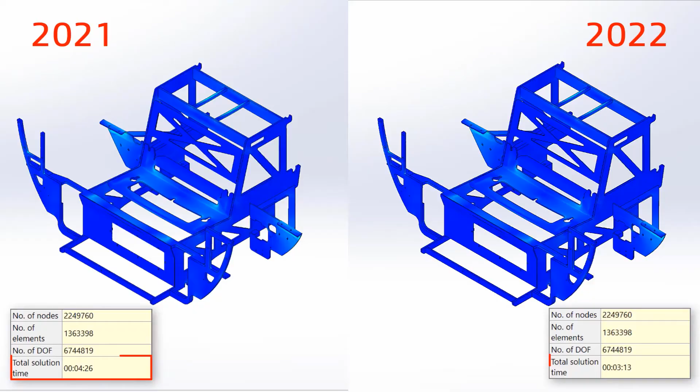Hello SolidWorks community. SolidWorks 2022 is just around the corner. It features many enhancements to help you work smarter, work faster, and work together. We have focused on quality and robustness, so your tools are more reliable than ever. And of course, many new features you won't want to live without.

Each year, you face new challenges. You rediscover the old ways of working are just not good enough. At SolidWorks, we agree. Each release, we make significant strides to improve the tools you trust. We also are transforming our ecosystem with our 3D Experience Works portfolio. You take what you already know and love with SolidWorks and supercharge it with all of the System-based technology, so you work smarter, work faster, work together.

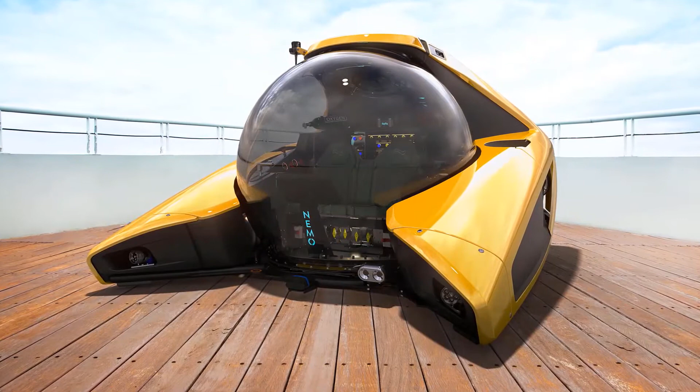This year we feature a long-time customer in the Netherlands, U-Boat Worx. This fall, they are launching their Nemo submarine. It is one of the most sophisticated pieces of underwater tech available to consumers. It's an award-winning, revolutionary design and personalized for individual use. We are so proud to be part of their innovation, as well as your next great project. For now, sit back and take in everything new in SolidWorks 2022 and the 3D Experience Works.

Well, good day everybody, and welcome to yet another Innovation Day, which is happening online. We certainly hope that this is going to be the last one, because we genuinely really do miss getting out there once a year and meeting the customers around the country, putting names to faces and actually getting a personal touch and getting that feedback directly from you as to how we're doing and how the product's doing, that sort of thing. We honestly miss that.

So look, it has been a bad year. It's been difficult for everybody, obviously not just here in New South Wales, but for everybody around the country. So hopefully this is going to be the last one. Next year we're going to be back to normal.

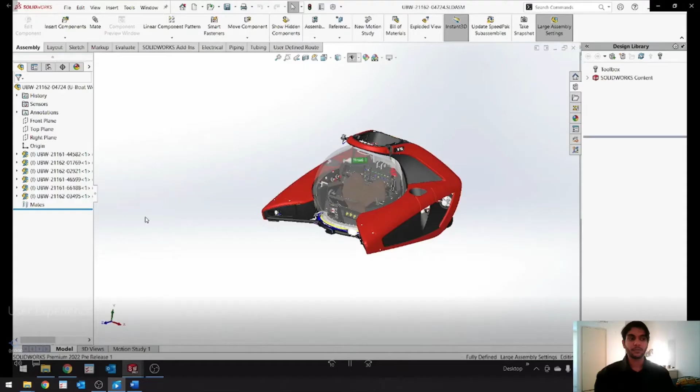SolidWorks 2022 helps us be more productive with thoughtful user experience enhancements. The Nemo assembly isn't complete without all 4 thrusters in place. Command search is integrated into the S key shortcut menu. You can even have SolidWorks show you its location for future reference.

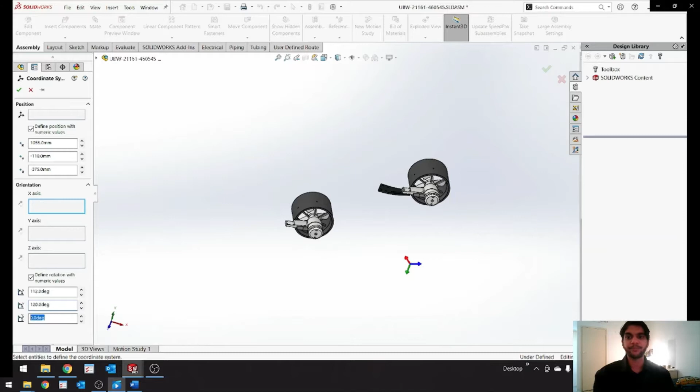The position and orientation of the thruster has been precisely calculated, so mating to a coordinate system would be a good strategy. In SolidWorks 2022, coordinate systems can be defined using specific numerical values, which makes the placement of the second thruster a snap. Origin visibility is currently turned off. With SolidWorks 2022, the new Q key keyboard shortcuts allow you to quickly turn on the assembly or component reference geometry, such as planes, coordinate systems, and origin.

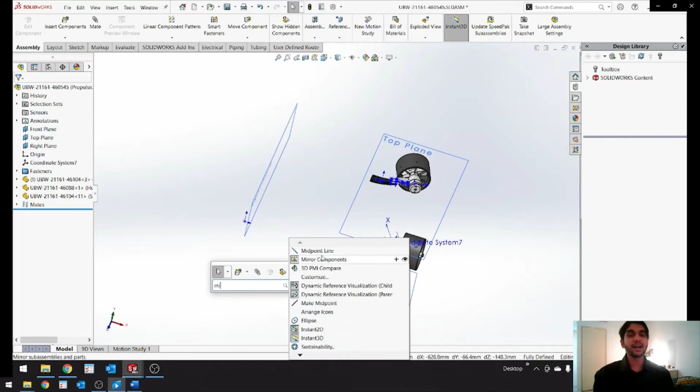These thrusters need to be mirrored. Commonly used tools like this are conveniently added to the shortcut bar with one click. And the new Q key shortcut works even while creating these features. As we can see, we have successfully created the mirror, we have successfully mirrored the subsea component.

Dismissed messages have always been easy to show again, but now they are more easier and convenient. Now, hovering over an item reveals the whole message, making it easy to determine if we would like to show it again.

When you need to collect a project and all reference components, there is no better tool than Pack and Go. In 2022, you now see a progress bar which gives you an indication as to how long the process will take place, and which is especially useful when working with larger assemblies.

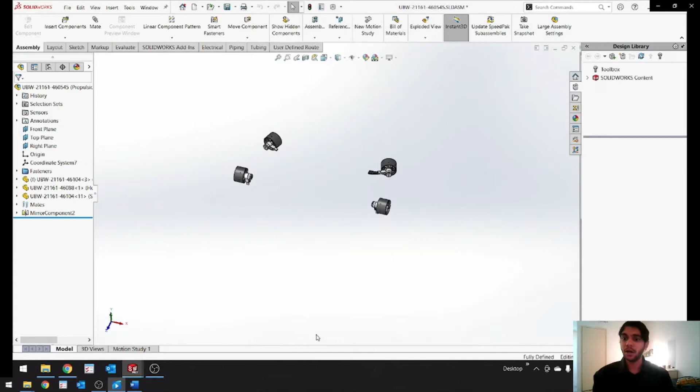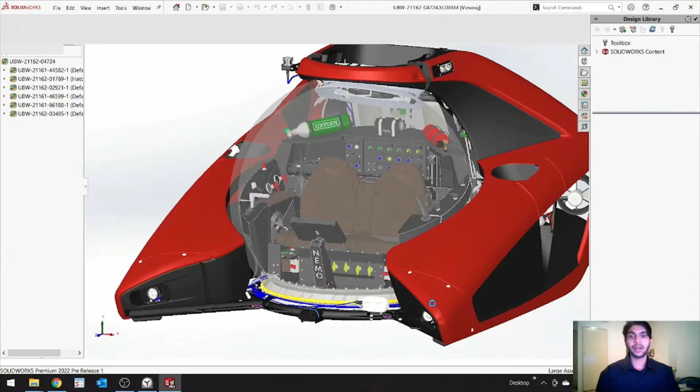SolidWorks 2022 offers faster ways to access your design from the start. Large Design Review mode, introduced in a previous release, provides a lightning fast way to open your large assemblies with very few limitations. The large and complex 6031 component Nemo assembly from U-Boat Worx opens in merely 13 seconds, allowing us to work faster.

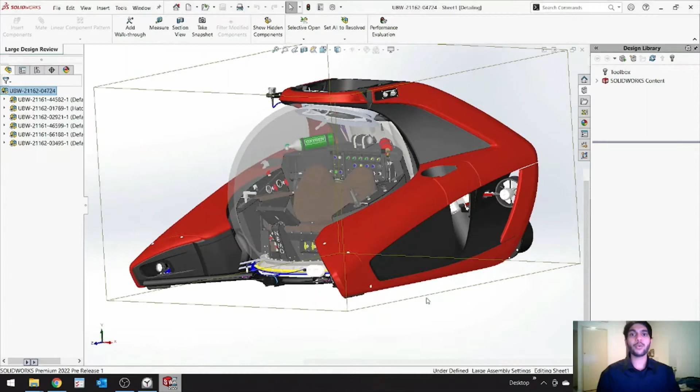New in SolidWorks 2022 is the ability to easily open drawings from large design review assembly in detailing mode from the right mouse menu. Detailing mode is an extremely efficient way to both open and work on your existing drawing documents. This helps us to be more productive and quickly get our drawings done. Like opening the large assembly of Neo, the drawing is opened rather quickly as well. It takes about 28 seconds to open the drawing file.

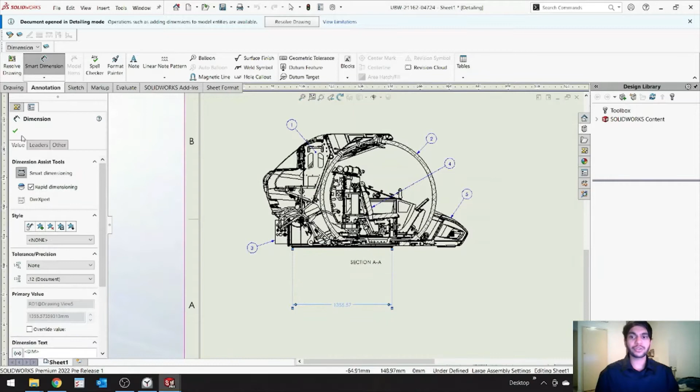Detailing mode is a fully interactive way to work with large drawings. Even though there are already views created, we can continue detailing those views and make changes to them. We can add dimensions, notes, tables, and more. This makes it very easy to make changes to large drawings and design files.

The ability to quickly access drawings from large design review mode in this way will streamline how you work with large and complex designs.

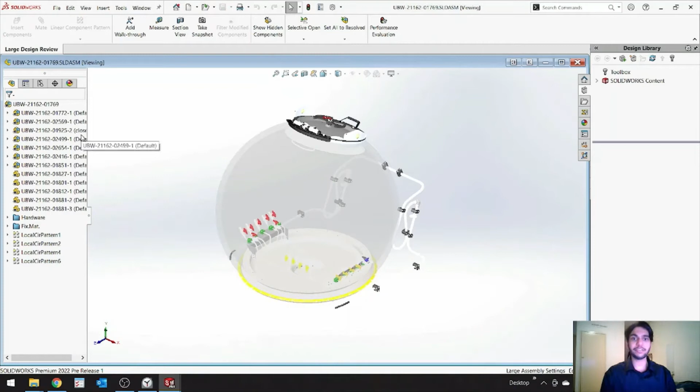Additionally, in 2022, you can open sub-assemblies from large design review mode in this lightweight format as well. This ensures that you are not loading any unnecessary information that's not currently needed. Whenever you want to access a fully resolved module, you can choose to open it from the same right mouse menu. Likewise, you can always resolve an assembly that is already opened in large design review mode. This ability to access lightweight files and quickly switch between them will ensure you can work in the most efficient ways possible.

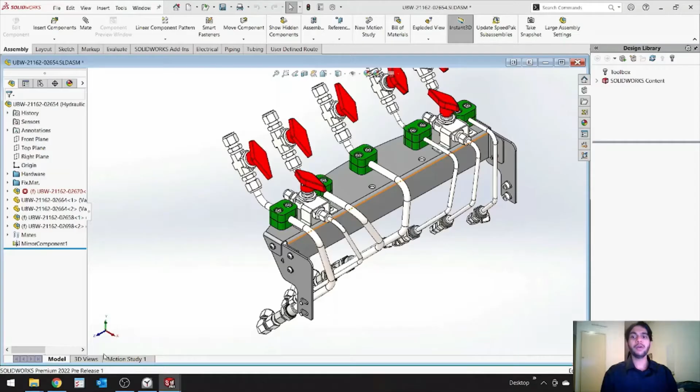Moving components in SolidWorks is now easier. When selected from the feature tree manager, you are now presented with a triad that makes it extremely simple to get a component into just the correct spot.

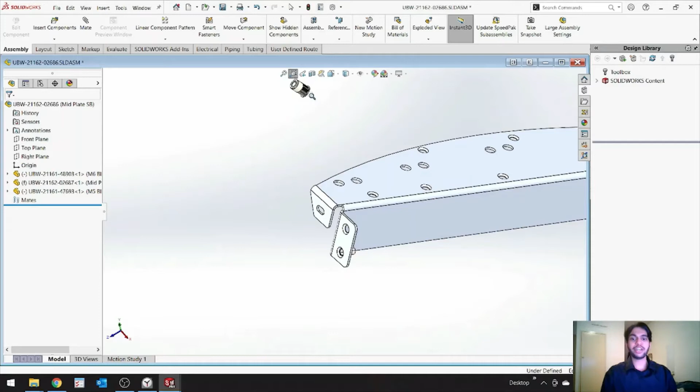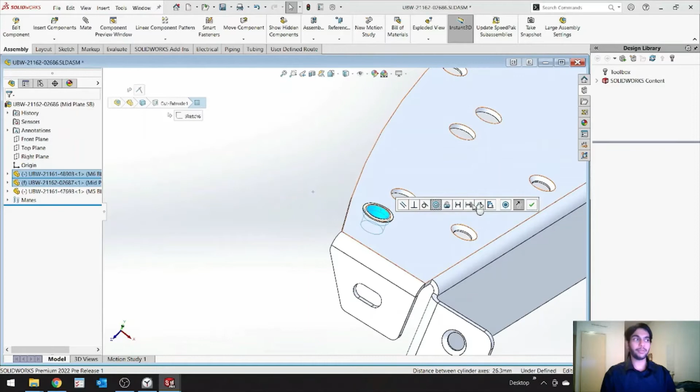The Quick Mates toolbar in SolidWorks 2022 also gives you more control by presenting you with the option to make adjustments before adding a mate, such as the alignment. This is also true when adding circular types of mates, where you will be given the opportunity to lock the rotation of them before confirming. This is especially useful in the case of mates that allow both of these conditions.

The intelligent pattern driven patterns get even smarter in SolidWorks 2022. Now, when you choose a component to pattern, SolidWorks will always choose that component's location as the seed for determining how to create and position the other instances.

Even if you change the location of the component to a different location, the pattern still assumes that the component you are patterning is in the seed position. This means it's much easier to take advantage of existing patterns and hole wizard features to quickly position multiple instances of components such as hardware and rapidly populate your assemblies.

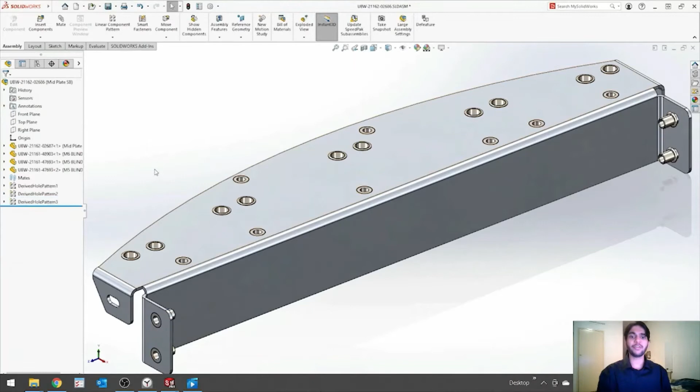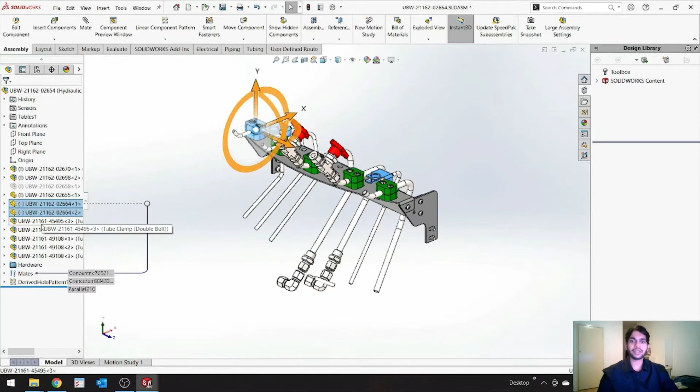Configurations are a powerful way to create alternative versions of parts and assemblies all within a single document. You can choose to have instances of components included or excluded from different versions of the design. You can also choose to use alternate configurations of other components in each configuration. The possibilities are endless, and as more variations are made, keeping track of this can get complicated.

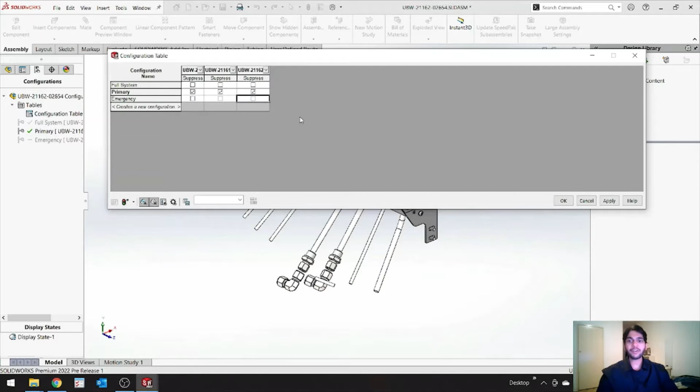However, new for SolidWorks 2022 is the new configuration table. The table makes it much easier to both create and manage configurations. From the table, you can add new versions to your design, and you can also choose to toggle the suppression state of different components on and off. Likewise, you can specify which version of the components to use in each configuration.

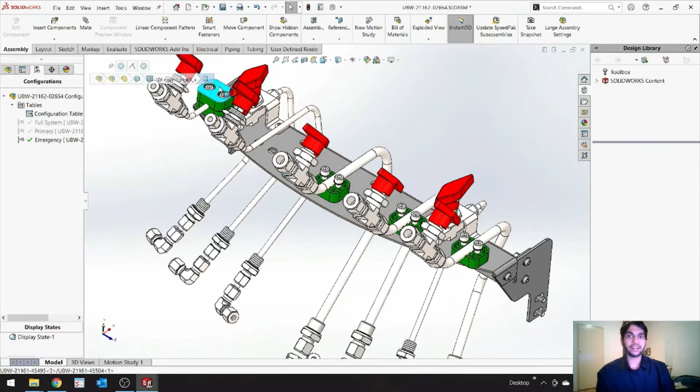If you make changes to the configurations manually, such as suppressing components that weren't included before, they will be added to the table as well. Let's suppress some of the components manually to check this in our configuration table.

The configuration table also has filters to make it easier to focus on what's important. For example, you may want to ensure that the custom properties for each configuration are unique to each new version of the assembly. We can do that in this configuration table.

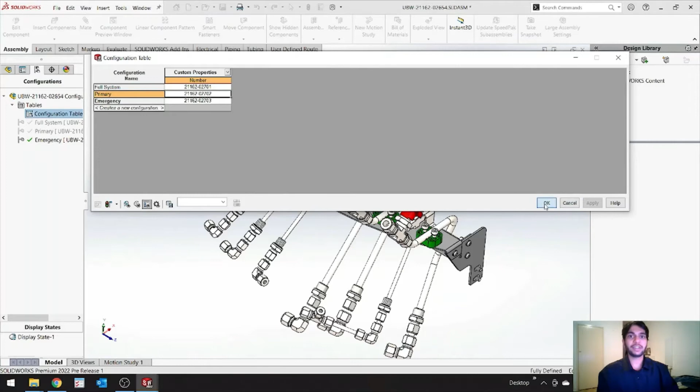When looking at a bill of materials, there will be cases when components in the design should not be included. This option can be controlled from the component's properties in the assembly. However, this can become time consuming for parts that regularly should not be included. New for SolidWorks 2022 is a configuration option at the component level where you can specify this should be enabled by default, saving time from having to change it each time the component is used.

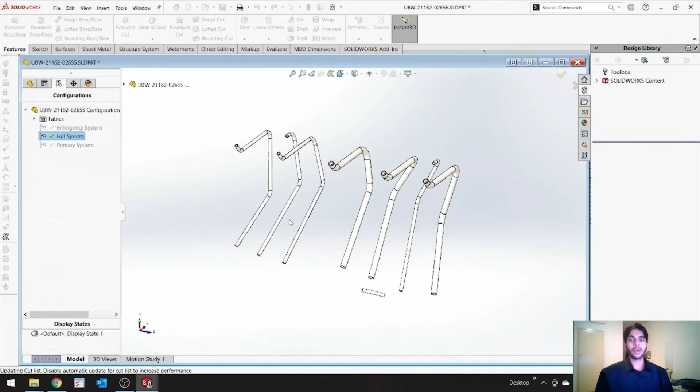SolidWorks 2022 introduces a wide variety of performance and usability improvements. These improvements ensure that you can focus on the engineering of your designs and spend less time determining how to manipulate them.

Designers demand the ability to create manufacturable products using an ever-increasing variety of file formats. SolidWorks 2022 makes this easier than ever with new enhancements for Mesh BREP formats and tools that help you view and edit critical information.

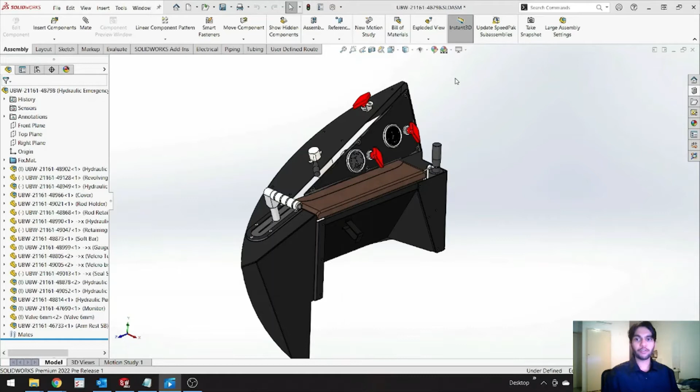This ball valve, equipped with a lockout tagout feature, is perfect for a control panel, but the handle is too plain. The supplier has provided their files in Mesh BREP format. As we can see, there are 3 different solid bodies.

In SolidWorks 2022, working with these files is just like working with native geometry. Creating features like chamfers, extrude, making plane references, and more no longer require intermediate bodies and Boolean operations.

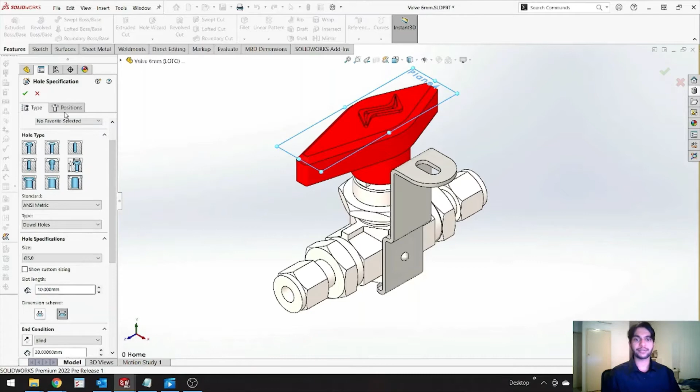The handle needs a slot for a lock. Now, in SolidWorks 2022, hole wizard slot length can be defined by overall length or centers. Also, when positioning the slot, the tab key toggles between vertical and horizontal orientation.

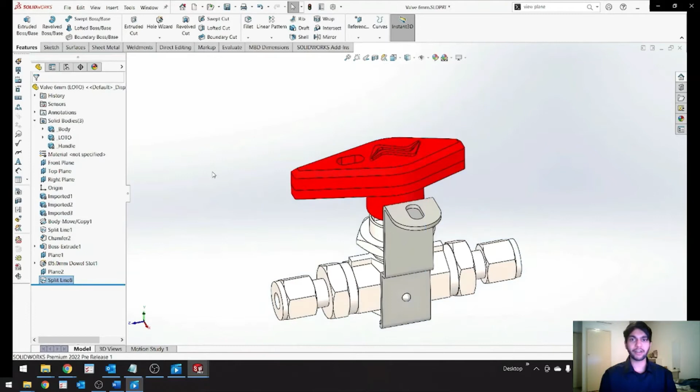Manufacturing this handle will require draft. Bidirectional parting line draft would be the most appealing, but first let's create a split line which can be used to create this bidirectional draft. Let's access the draft command from our shortcut bar.

In SolidWorks 2022, you can now create draft in both directions by using a parting line rather than having to create two separate draft features. This mesh file contains three bodies.

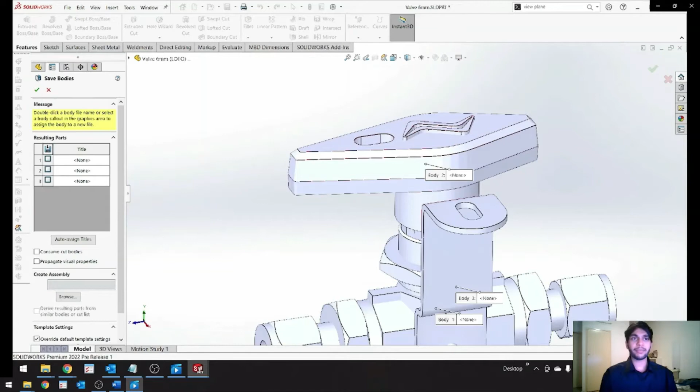Let's save them as a single body. Now, in SolidWorks 2022, Pack and Go recognizes the reference created when using the Save Bodies and Split Part command. This way, you can choose which files you need without having to find them manually in Windows Explorer.

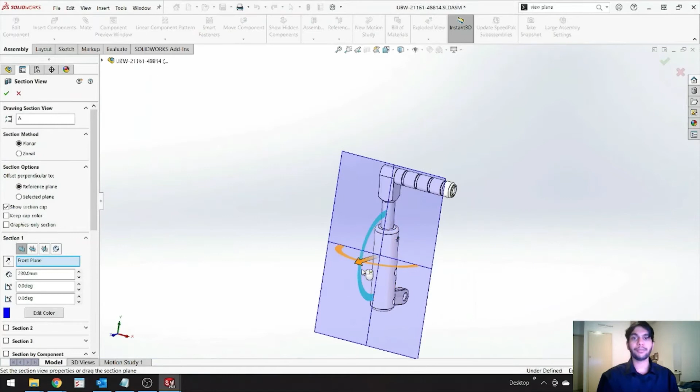Section views are a great way to inspect components, but sometimes a suitable plane doesn't exist. Now, you can specify a section view from any cylindrical face, conical face, or axis.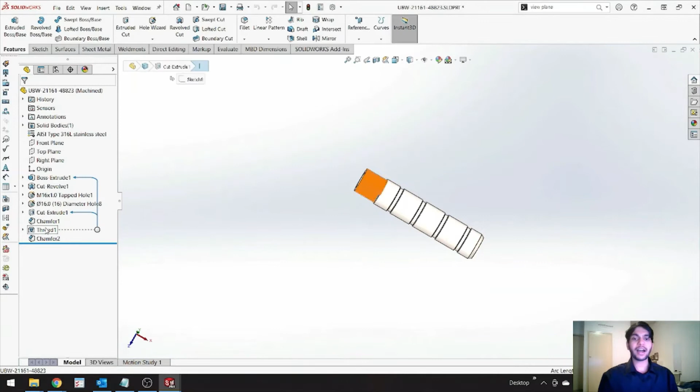These cut threads are useful for rapid prototyping, but it's too much detail for higher volume manufacturing, and they make the file large and complex. Therefore, the new stud wizard is a great choice here, as it automatically recognizes the diameter of the boss but still provides a list of different thread sizes and pitches to use. The stud wizard adds cosmetic threads that can be called out in a 3D annotation or 2D drawings.

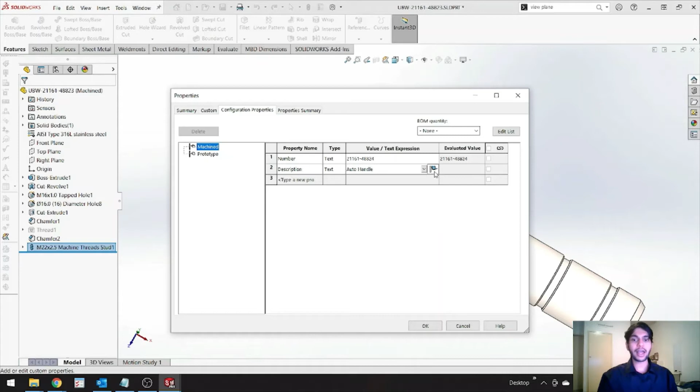In SolidWorks 2022, configuration specific properties have been separated into two tabs: Configuration Properties and Properties Summary. In the first tab, property information is added just like you would expect. Now, you can choose which configurations they are applied to using the drop-down. The Properties Summary tab provides a useful way to compare configurations based on custom properties.

Designers sometimes have no choice of the files they receive from the supplier, but still need to support the design through to several different manufacturing methods. SolidWorks 2022 provides the tools you need to get the job done fast and efficiently while providing improved visibility to critical product information.

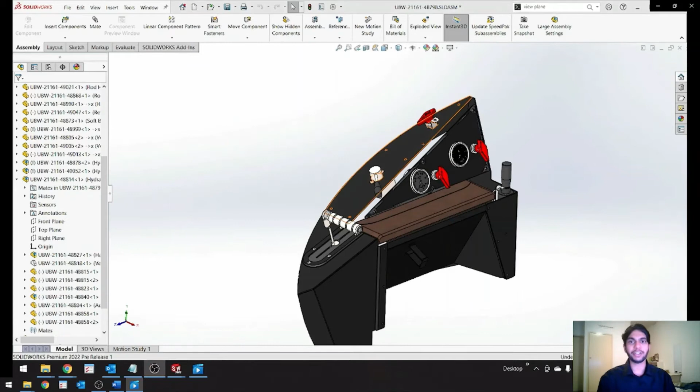SolidWorks makes it easy to create frames and structures with structure systems. 2022 is no exception, with enhancements to secondary members and more. Secondary members are defined using existing structural bodies.

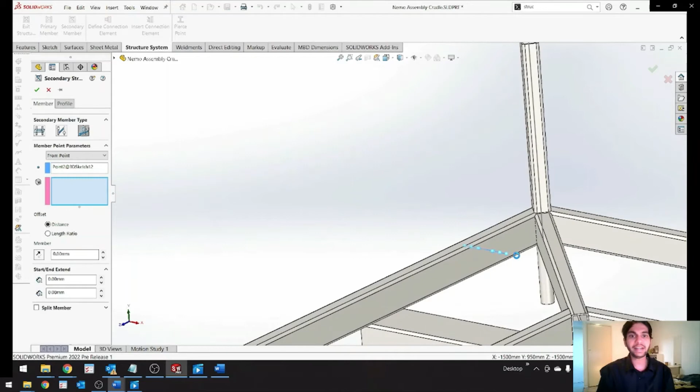These vertical posts will be carrying a heavy compressive and bending load, so they will need extra support. Now, creating multiple secondary members is fast - you just need to select a point and multiple bodies are created. All corner treatments are just as intuitive to define as they have been in the past, giving us full control over the end result.

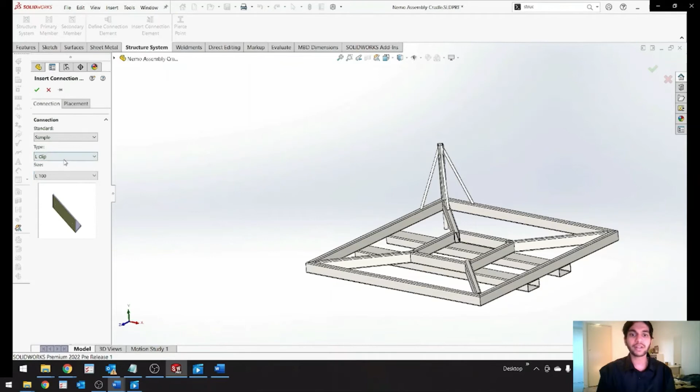Also, new to SolidWorks this year is the ability to define or insert connection elements. These are great for members that are designed to be bolted rather than welded.

These legs require a base plate so that the cradle can be attached to the floor. Just select the member and the plate is automatically centered at the end. If a connection element doesn't meet your design need, it can be adjusted on the fly. Let's add another plate at the top to complete the design.

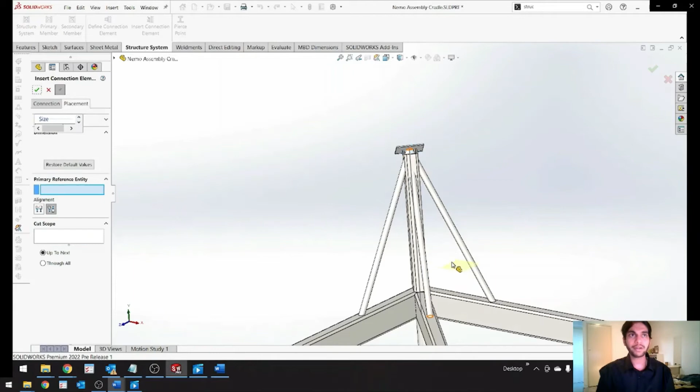Gussets and end caps are also supported for structural members in SolidWorks 2022 and are just as easy to define as before.

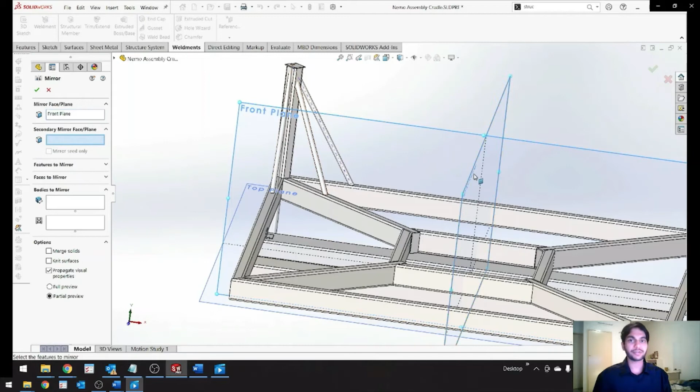Mirroring features and components is a very commonly used function. Now in 2022, you can mirror across two planes or faces, and this operation no longer requires two separate mirror features, it can be done in a single operation.

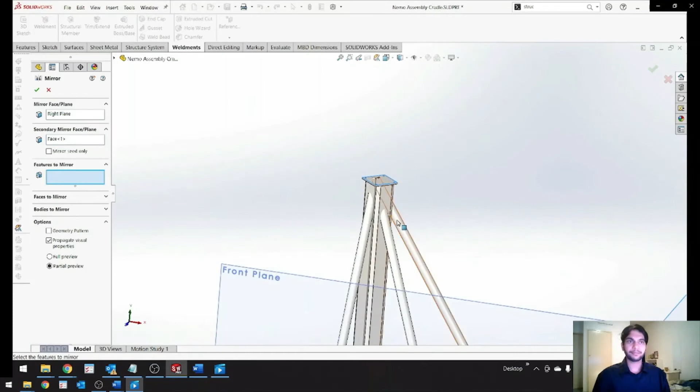Let's create another mirror command. Select the right plane and the face of the base plate, then select the bodies to mirror, using multiple body selection. As you can see, we have successfully created a mirror operation using two different planes.

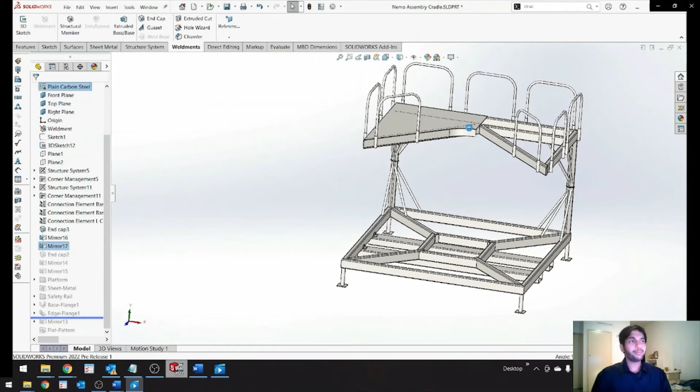SolidWorks introduced the ability to create an edge flange on the circular edges of a non-planar base in 2021. This has been improved to allow you to edit the flange profile directly inside the property manager so you can specify the exact flange length you want.

Let's go to edit flange profile and select the exact length that we want. It's a simple drag and drop, and it will cut the extra flange for us.

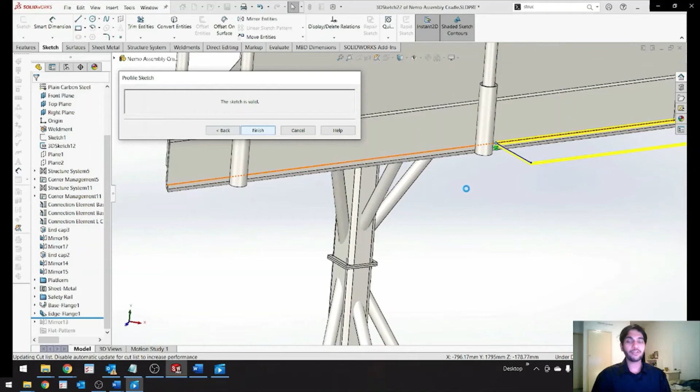This structure system is powerful but flexible too. With these new enhancements to secondary members, connection elements, mirroring, and sheet metal, creating frames and structures is easier than ever.

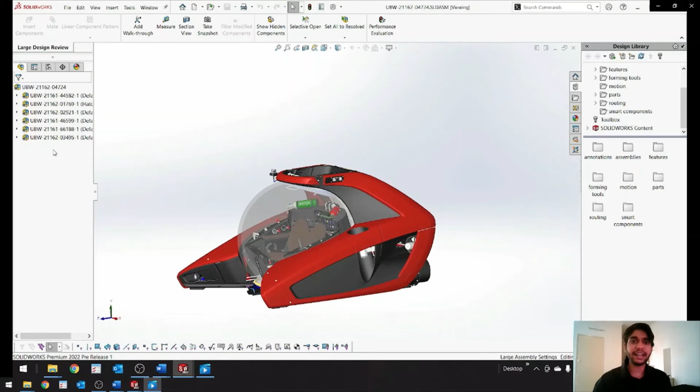Companies need to build designs right the first time. That means clearly communicating through SolidWorks drawings, and sometimes these files are huge. You can open even your largest prints in just seconds and work on them without the overhead of loading any parts or assemblies, or even having them on your machine.

You can edit notes, snap in the missing balloon, as well as organize sheets. We can even add dimensions as well as set tolerance limits in this detailing mode. This makes it very easy to work with huge files in SolidWorks 2022 using detailing mode.

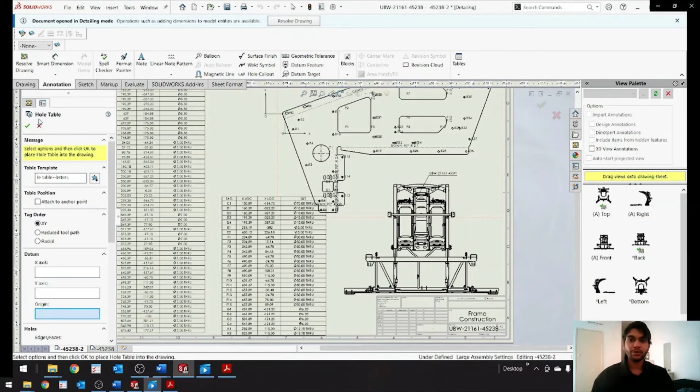In SolidWorks 2022 detailing mode, we can now even insert hole tables. We go to tables and insert the hole table. We can also drag and drop standard views from the palette in detailing mode. When we're done with the changes, we can save them as well as print them in a completely accurate document.

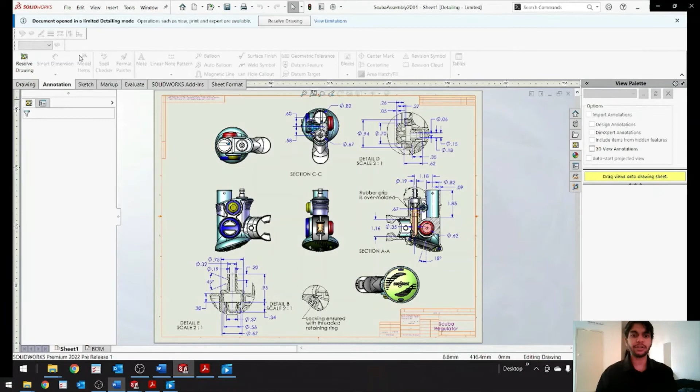What about the older drawings that haven't been accessed in years? In 2022, SolidWorks has extended the ability to open any prior version drawing right to detailing mode. This file was last opened in 2001.

You will always be able to open a drawing even if you don't have the reference model, make changes, and save them as PDF. What else is new with drawings?

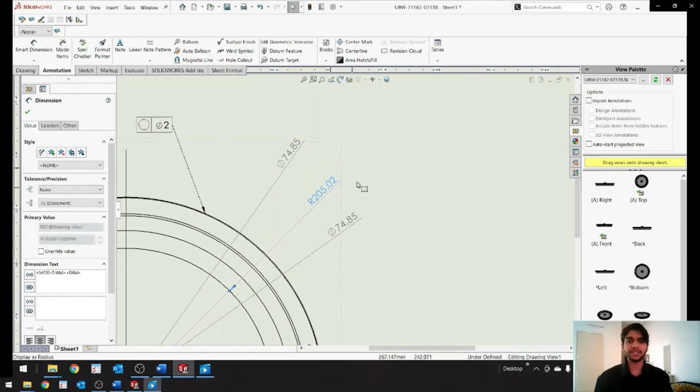How about a new in-context menu? This pop-up lets you toggle a circular dimension between diameter, radius, or linear. For turned parts, the new symmetric linear diameter dimension will come in handy.

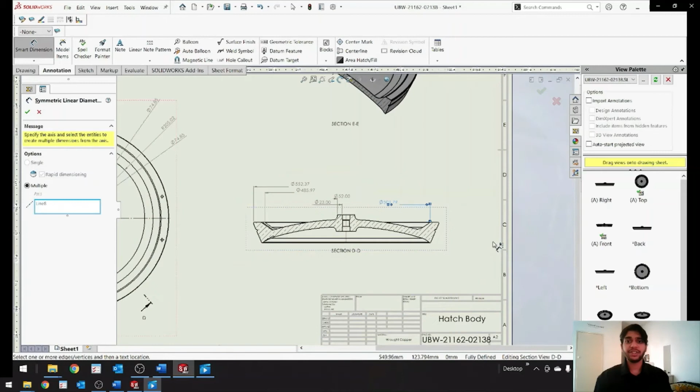This new annotation type allows for a clean section view by eliminating redundant leader lines.

Geometric dimensioning and tolerancing allows functional definition of component features and allowances, so I can clearly illustrate manufacturing intent. SolidWorks 2022 introduces a brand new interface to define geometric tolerance indicators. The intuitive step-by-step input is easier than ever.

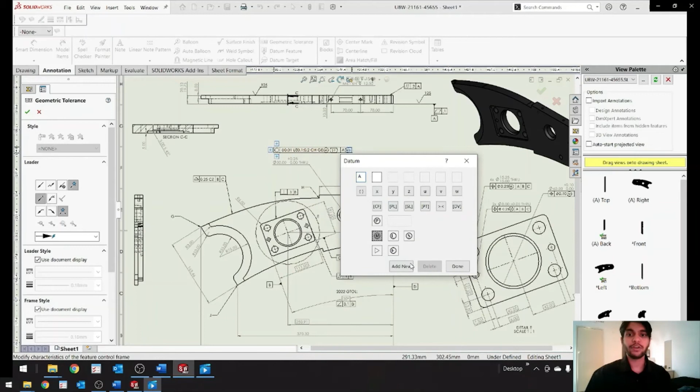Specifications, zone, features, filters, characteristics, modifiers, and datum references. We can even add adjacent and auxiliary indicators, and create text, stacked, and composite indicators.

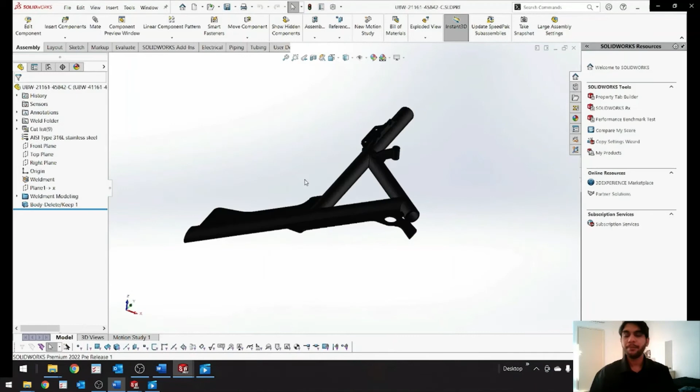In a design like this, I have many unique weldment parts. All of these parts have their own cut list. This is rich data, but how do I roll that up to one assembly level table?

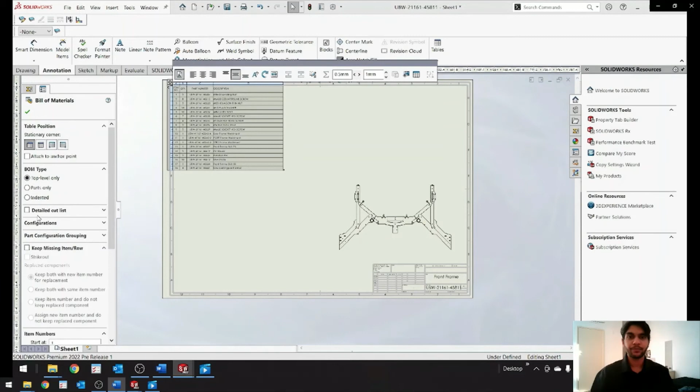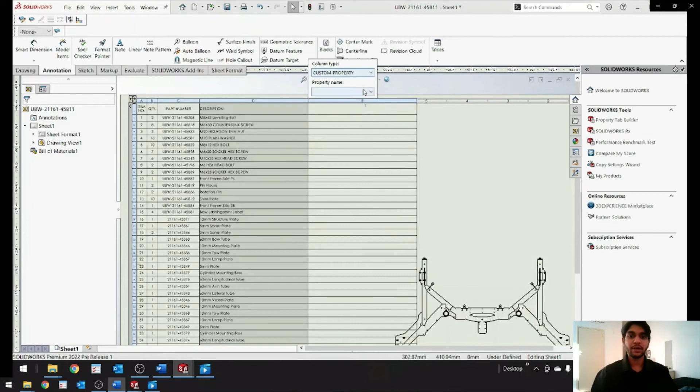With SolidWorks 2022, the detailed cut list option is available for bill of material of all types. This means you can aggregate multiple cut lists into an assembly BOM, providing you with more flexibility and depth of control. We can also link custom properties to this cut list table.

Predefined views are useful to give new drawings a standardized layout. Now in 2022, the flat pattern view is available, and there is a new option to toggle bend line visibility, increasing your ability to automate documentation of sheet metal parts.

In SolidWorks 2021 electrical schematic, if you wanted to use a manufacturer part which wasn't available in the manufacturer parts library, we had to access a web browser and download it from there.

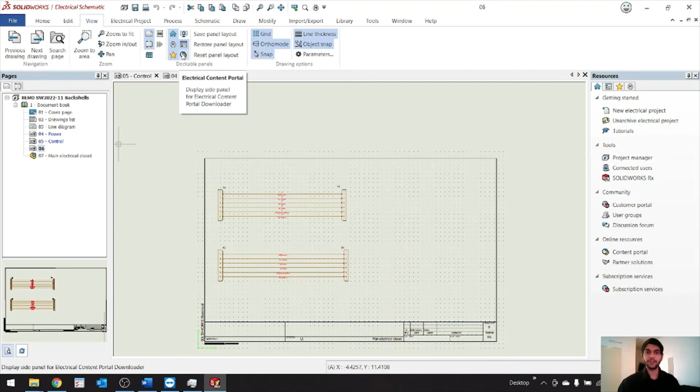But now in SolidWorks 2022, it has been made easier, and you can access it under the View tab Electrical Content Portal. All the newly added manufacturer parts can be accessed from here.

Not only that, we can search for a particular manufacturer and access all the manufacturer parts available. In this case, we have used Wago manufacturer as our reference.

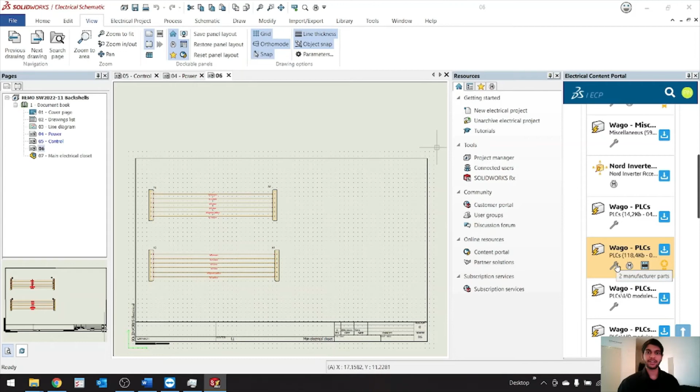PLCs have different libraries, and one that you may need has different sections like 2D footprints, symbols, and manufacturer parts, which can be accessed from here itself. That's giving us more flexibility while working.

Welcome to SolidWorks 2022 Visualize. Bringing a concept live in the design stage through product rendering and animation can help accelerate sales and marketing initiatives. Let's see how Visualize 2022 makes it easier than ever to generate professional level output for any user.

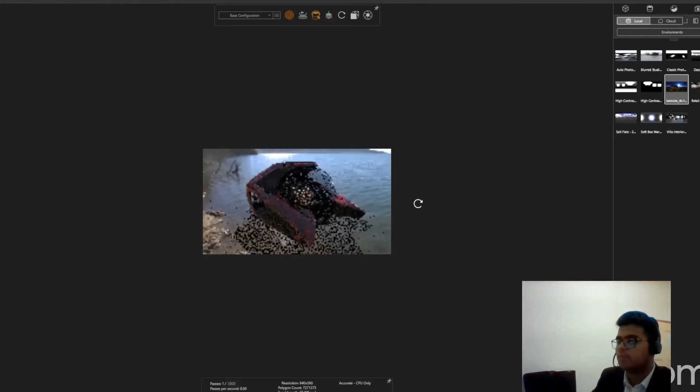HDRI environments have long been supported in Visualize. These 3D assets can apply a background image but also include some scene lighting. This lakeside environment has the perfect sunlight source, but the background image will need to be replaced with something more targeted to the potential commercial audience.

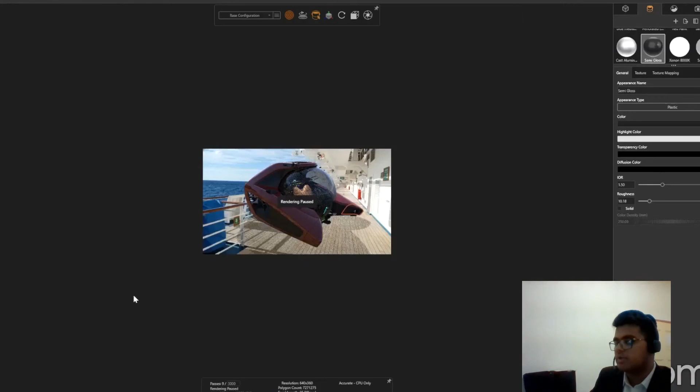Since 2D stock images are accessible and come in all shapes and sizes, this can add the perfect touch to any rendering, but traditionally requires a trial and error process to align the model perspective to the background image by itself. Visualize 2022 simplifies this process dramatically with the new match camera capabilities.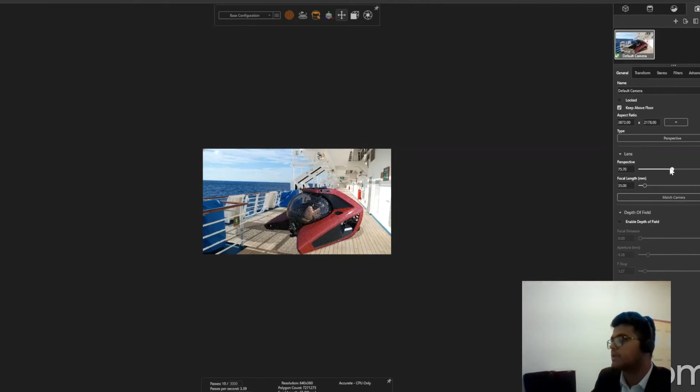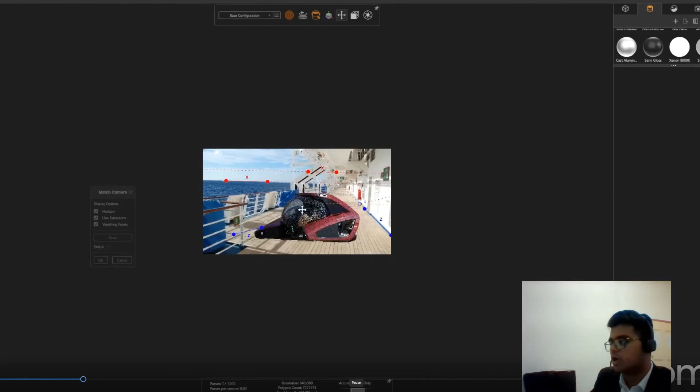Using two-point perspective of the horizon and ship structure along with the ship walkway, the camera focal length is calculated and applied to the 3D geometry. This builds additional photorealism into the project by seamlessly integrating the 2D image into the 3D model.

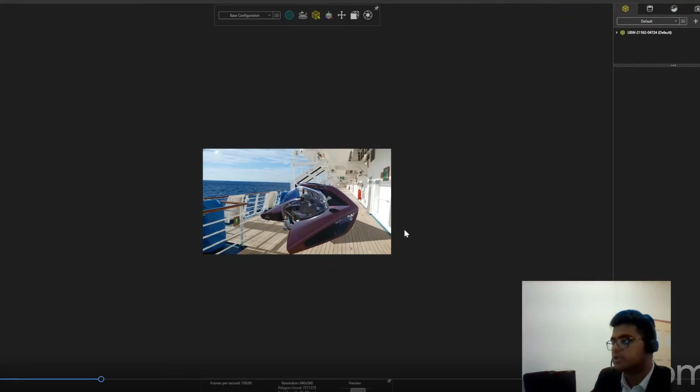The next step is to make sure that the location of the light source in the 3D environment aligns with the light source in the background image. Rotating the previously added HDRI environment and watching for the Nemo shadow to align with the shadow on the decking is easy. Unfortunately, the shadow cast by Nemo seems to bleed off of the ship wall.

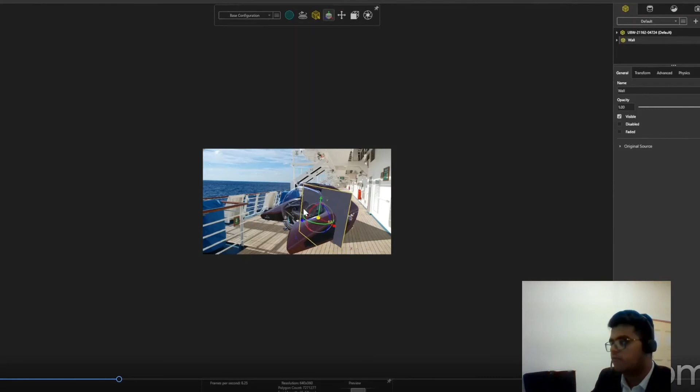You can see this in the following video. This is no longer a problem in Visualize 2022. Primitive geometry can come in handy for multiple scenarios, and in this case, the wall primitive brings in a vertical plane, which can then be positioned and scaled to replicate the wall location.

New in Visualize 2022 is the ability to convert this geometry to a shadow catcher, which leaves the shadow exposed while removing the primitive geometry, giving the exact level of detail needed for this rendering. Now you can see in the following figure, the shadow has been captured throughout the walls.

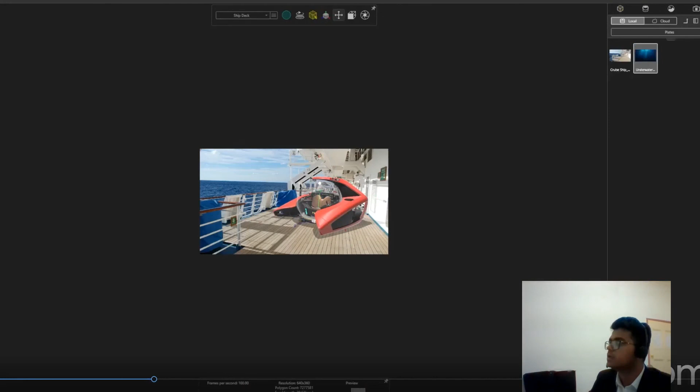For the next image, capturing Nemo in its natural habitat is a must. Leveraging the configuration and additional cameras in Visualize is an easy way to keep all your renderings in a single project. For an underwater shot, updating the HDRI environment and background image from the library asset is just a drag and drop. As we saw, it's important to replicate the scene lighting as closely as possible.

This time, an additional area lighting is added by switching to the top view and using add to match camera to create the light source.

At any point, you can switch between live rendering and preview mode. This is an easy way to manage system performance when setting up your project, such as adding and positioning additional 3D assets. For this image, including the blue line snapper adds a nice touch. But what about adding a school of fish?

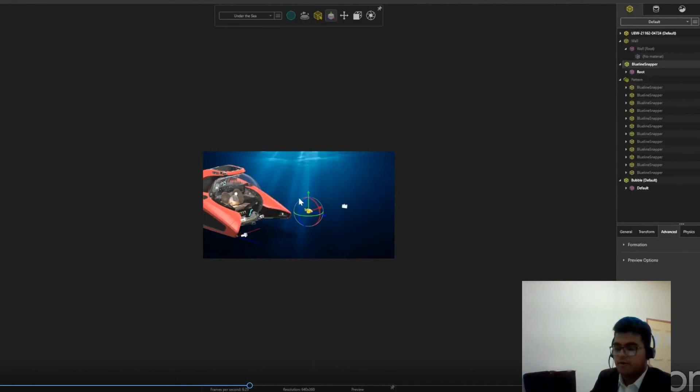Previous versions of Visualize had the ability to create a model formation but required 2 or more instances. New in Visualize 2022, you can pattern and create from a single instance, and with a scatter feature, randomize these assets by defining the number of instances.

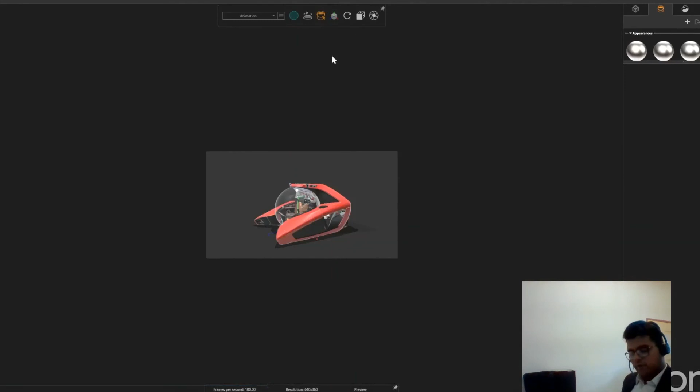For the final rendering, a third configuration is created to capture an exploded animation of Nemo. With the timeline enabled, groups are selected and keyframed to define their start and end position. Going through this process of keyframing, multiple parts and groups can quickly clutter the timeline.

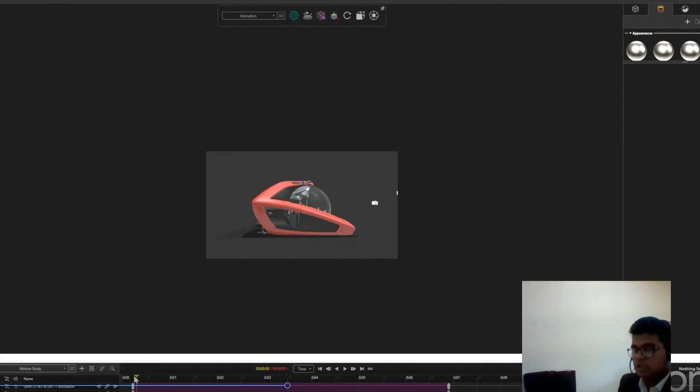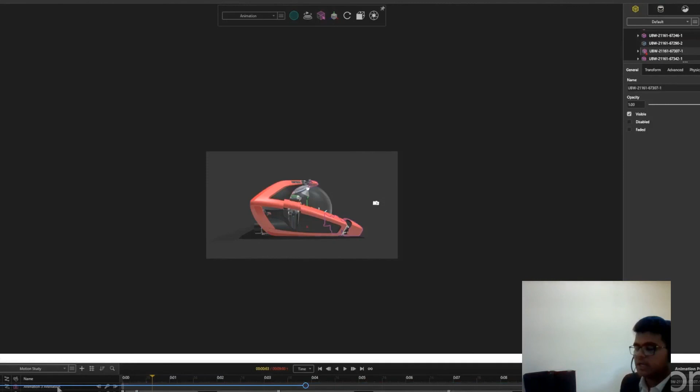Now in Visualize 2022, items added to the animation timeline can be nicely organized into folders by organizing into the group option, as you can see in the following figure. The animation ribbons can also be colored and coded, making it easy to find and reposition these keyframes into the perfect place.

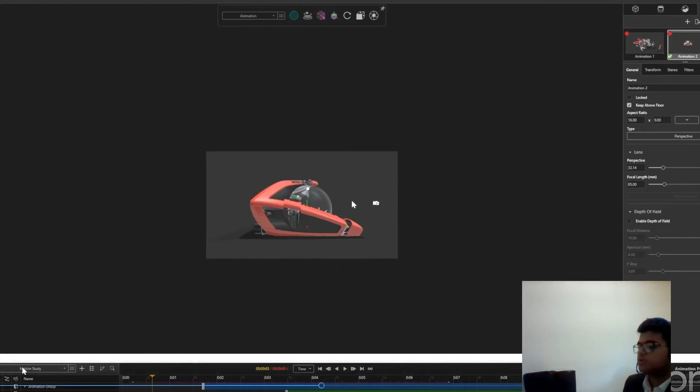The first camera is set to wide angle perspective and it is keyframed into the timeline. A single camera can capture the action, but multiple cameras really bring a professional touch, and you can easily repeat the process.

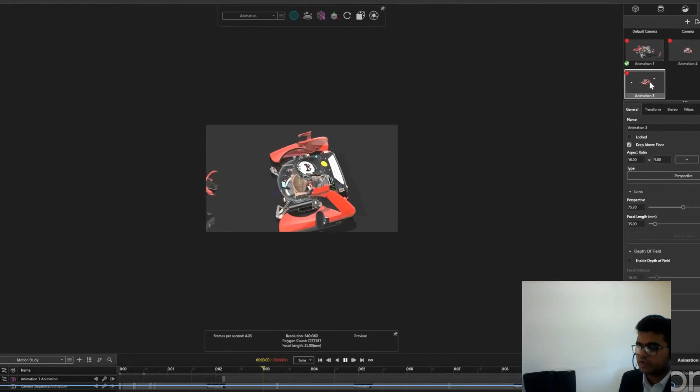Going back through each of these three configurations, everything looks good and the final render process can begin. As the process moves along and each rendering finishes up, I'm going to skip the rendering process for now.

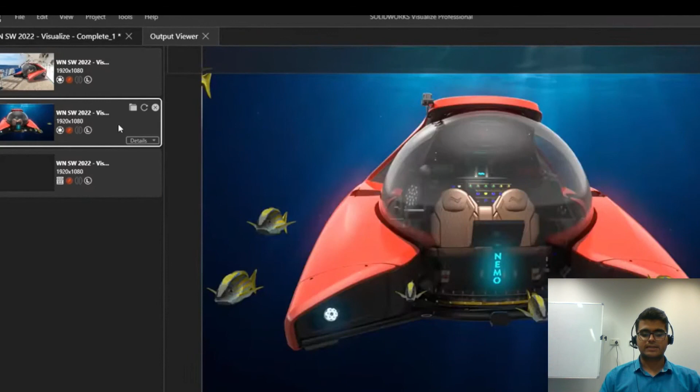Visualize 2022 offers a new, updated output viewer to keep your projects even more organized. Render settings can be reviewed and projects can be cancelled or re-rendered as needed. And best of all, project outputs are referenced and the final deliverables can be opened.

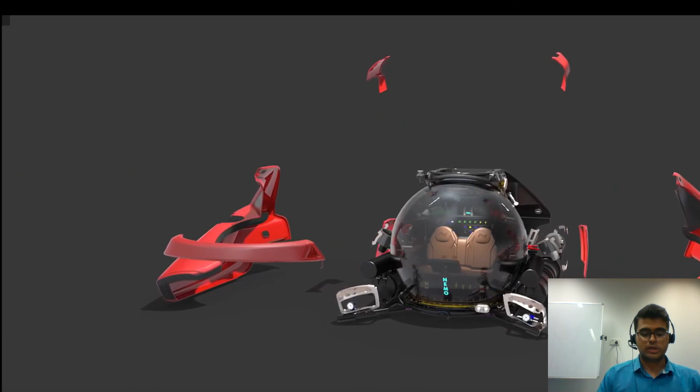Year over year, SolidWorks 2022 Visualize takes advantage of the latest rendering technology and simplifies it for the everyday users.